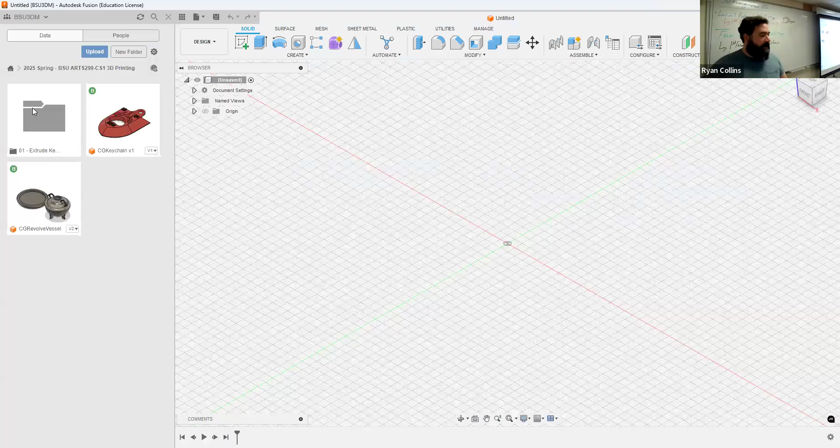First things first, I want to show people how to transfer files. If you started a project on your own file or your own team and need to transfer it in, unfortunately there's not a direct path to that. What you have to do is download the file from Fusion onto your computer, then re-upload it after you switch teams. So I'd open this up, open my little ducky puck. From here, I go to export, and it will automatically save it as a .f3d, a Fusion file.

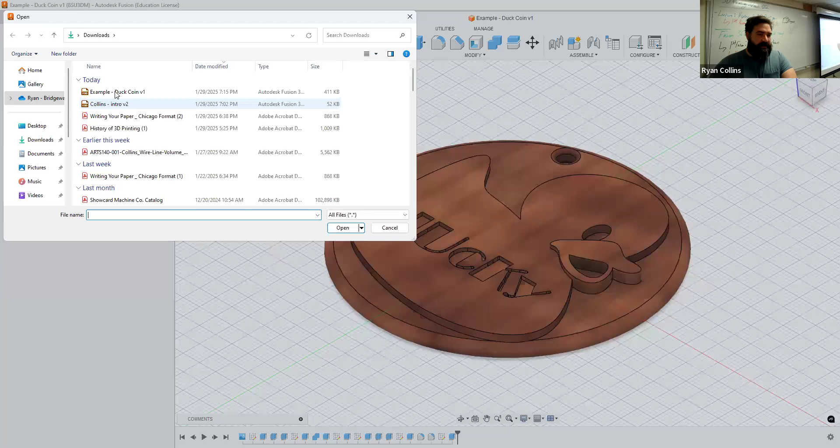Make sure you know where it's going on your computer. In this case, it's just going to downloads. Save, export—so you are actually exporting the file. If you just go to save, it's just saving the file as it normally would on the cloud storage online. From there, you go to upload, select your file, and that is my duck coin—open, upload. I'm not going to press upload because it'll overwrite things. But that's it, that's all you have to do. Unfortunately there's just not a direct one-to-one path.

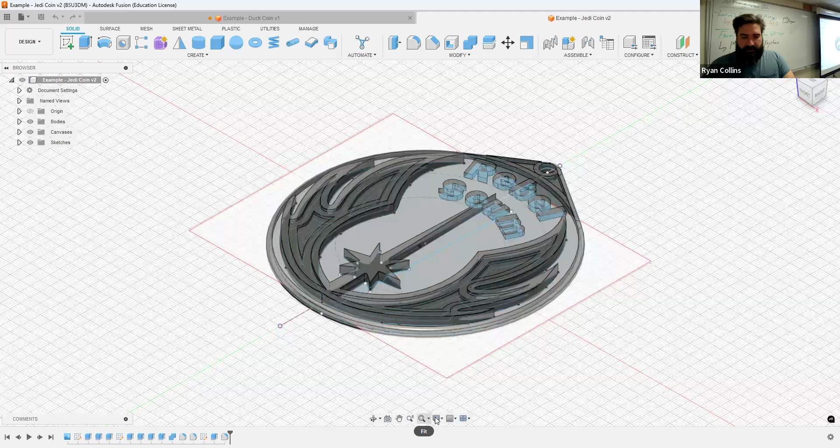All right, so I'm going to open up a couple of these just to show you some examples. Let me change the view settings because this gets a little confusing when it's hidden and such. There we go. And yep, that's current. Let me hide the canvas underneath, and hide the sketches. All right, there we go.

Just so you can see this more clearly, it automatically has an appearance—the default is like metal, supposed to be like steel. You can shift to auto color if you want. Hold shift and press N, shift-N, and it'll switch to an automatic randomly assigned color. It's a little easier to see what you're working on. That's all.

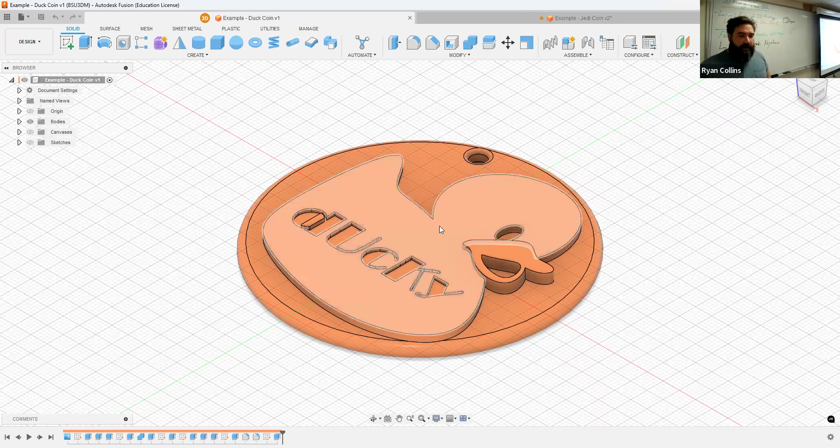All right, so this one we've got the little rebel symbol, rebel scum—why not, the little Jedi Order symbol. Great, you can turn this into a roundel, or an amorphous blob, doesn't matter. You could turn it into an adorable ducky, whatever you want to do. Main thing is we are making something where it's all one continuous piece that has layers extruded up. It can't just be one single thing, it needs to be a little more complex. But like you see here, tracing the duck, the bill, the eyes, and so on, you can extrude them to different levels and it will show up through them.

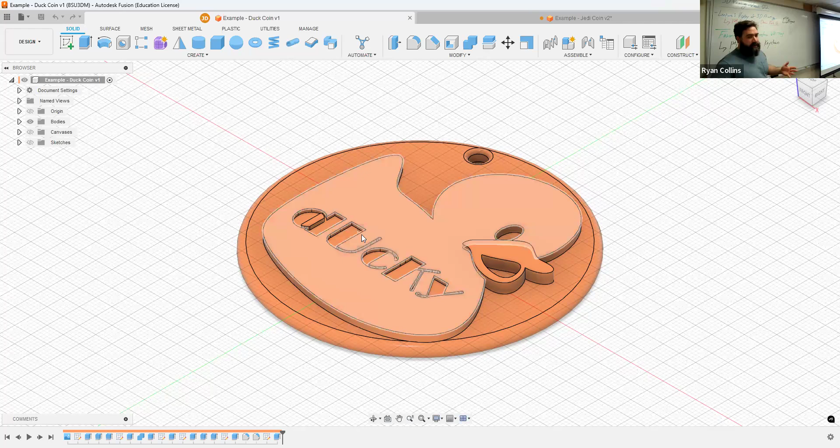Now, one quick word of warning about using text: if your piece is too small or the font is too small, it will not print, because the print head extruder only has so small a diameter. The extruder is 0.4 millimeters, so it's really teeny. But if your font ends up being 0.3 millimeters, it's just not going to print it—it won't just fail to come through, it will omit it entirely. We'll go through what happens and how to fix it. But ultimately, if we find ourselves in that position, either we scale up your object a little bit, or you go back and change the font, maybe make it boldface or something on your text. It's a very quick, easy fix.

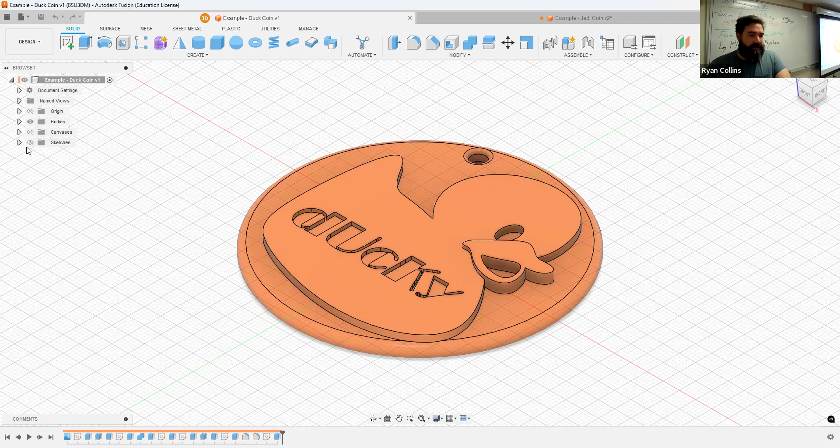All right, so just to go through some examples and show you how this works, first what I did is I imported an image of an adorable ducky. Find a picture, go to insert, or the default symbol, canvas. Bring that in, insert from your computer, find a picture, drop it in. And I'm just going to get out of this real quick. Let's see here, I don't remember what all I have here.

Let's say stock photo there. What you'll then have to do—I'm just going to hide this current canvas, the duck—is pick a plane. This is the standard thing for working with any sketch. You have to pick a plane, a virtual work environment. We talked a little about this last class, but these colored lines refer to different virtual directions, and they are subjective, meaning it's not always this way—it's just reference to how you're looking at the virtual plane.

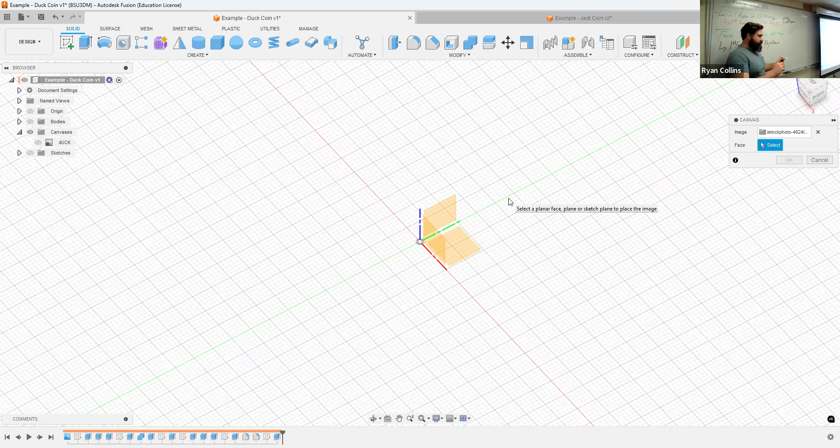So the red is your X axis, left and right, side to side. Y, green, is front and back, toward and away.

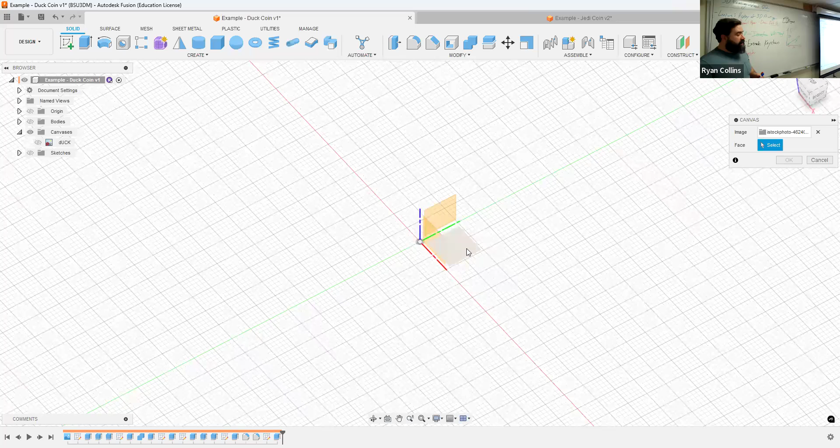Z axis, blue, up and down. So when I say I'm going to pick the XY axis, it's the one in between.

Ran out of colors. And I dropped my cap.

XY axis is like you're working on a tabletop, looking straight down. If it's, say, like the XZ axis, it's straight up in front of you, like you're working on a wall or a... I forgot the word for it. Easel. There we go.

Trying to find where I dropped my cap.

So in this case, I'm going to build on the XY axis. It's the easiest, like you're looking straight down from the top. There you go. Select. You have a bunch of modifiers here you can play with, like the different size, opacity, so like how dense the image is, how see-through it is.

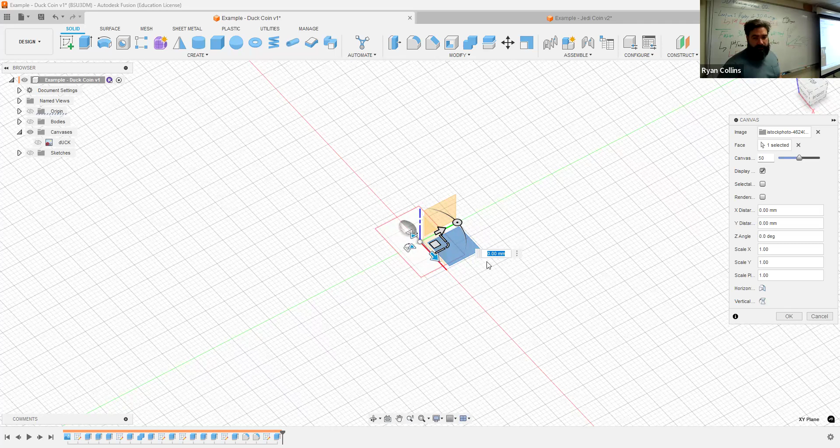But honestly, you can also just leave it as is. Don't worry about sizing it up. You can do that by hand later, mainly because sizing it is a scale, meaning it's relative. 0 to 1, meaning like if I want it half as big, 0.5, something between, or we can do it numerically, but you can see scale factors times 2, times 3, anything in between. You get the idea. But I'm going to leave it just as it was at 1.

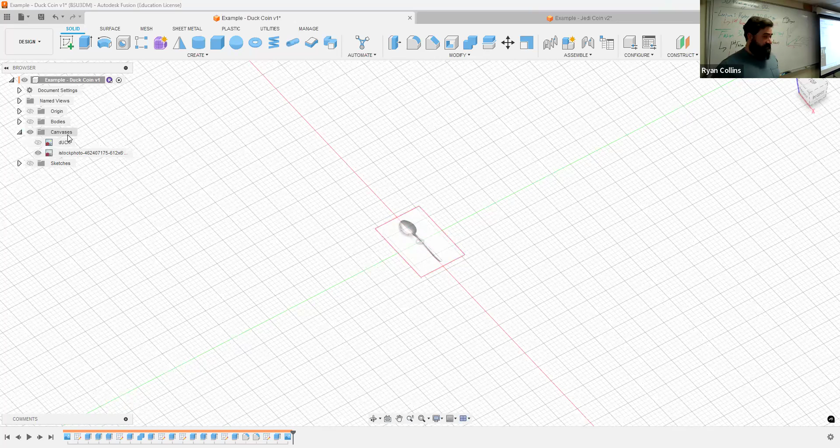Hit OK. Reason for that is I want to do something else called calibrate. I want it to be a specific size, not just relative size. To do that, I mouse over the image file, and if it's not showing, use the drop down, which now will have canvases there. Right click where it says the actual image. Go to not edit canvas, but calibrate.

What this will let me do, and I'm just going to snap to the top view, I'm allowed to pick 2 points. So in this case, it's a spoon. At the top and the bottom. It'll show you the actual distance between there. 14 millimeters. That's not that big. That's like yay big. Millimeters, not centimeters, millimeters.

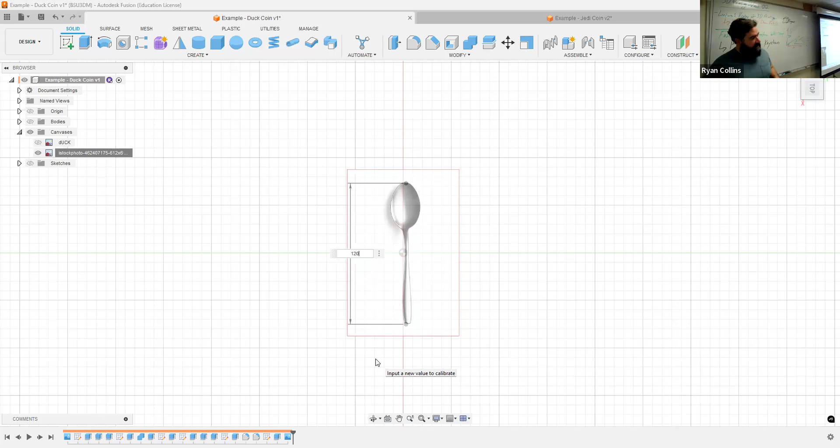Obviously, I want a slightly bigger spoon. Let's make it roughly, that's about 6 inches, 120 millimeters. No, not 120. It's more like 200. There we go. So let's say 120 millimeters. If you need, we have rulers over there that have both imperial and metric scale on there. Makes it a lot easier.

But, oh my God, that's gigantic. We resize. Press F6. It'll resize the thing. Where is it? Fit or resize. There you go. So that just shows you now I actually know exactly how big I'm working. So like when I said it needs to be no more than about 200 millimeters, now we're at the size we need to work.

But instead of making a spoon, I want to make a ducky. There we go. So you've calibrated the thing. You can always make changes to it later as you need. Cool. From there, you create the image. Let me cycle back on my time slider, and we'll walk through it.

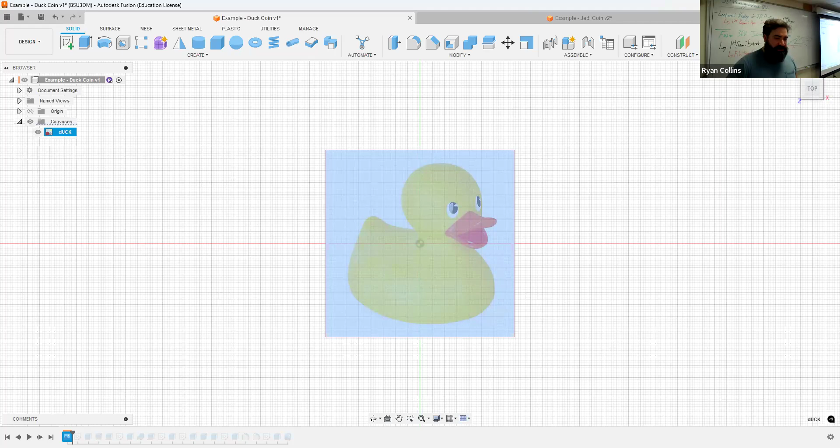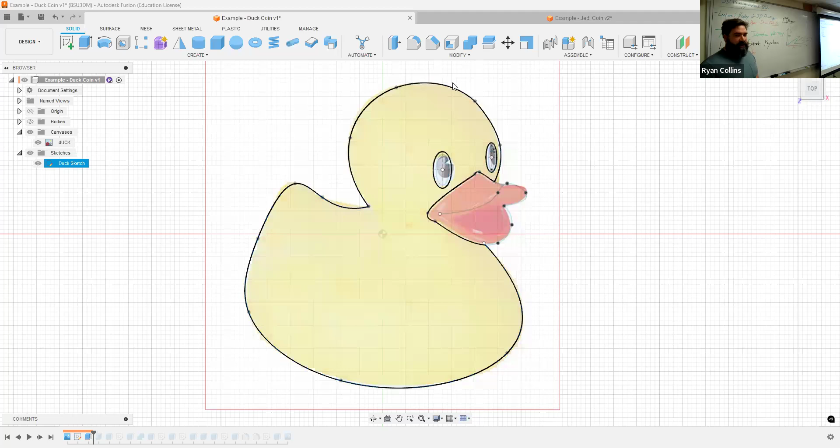I made the image, create a sketch. We're going to draw a sketch. We'll make an outline. I'll show you how to do some of this stuff. Now, the only reason you would make multiple sketches is if you want to isolate things. You cannot start a sketch, draw part of it, like the bottom, and then start another sketch and draw the head. That will not work. It all has to be the same closed sketch. I'll talk to you about what I mean in a moment.

From there, we're going to use that sketch and extrude stuff. Meaning, in this case, extruded the bill. Problem is I started hiding stuff when I was doing this. Making the eyeball, extruding, make the body, stuff like this. The body, these are all hidden for whatever reason.

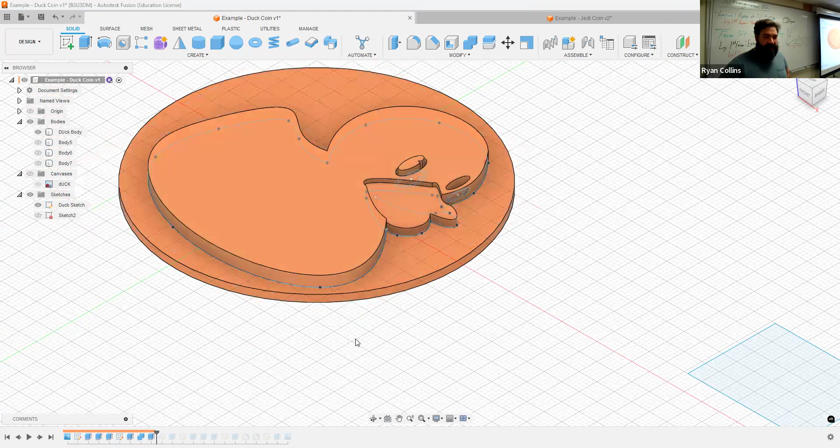These can be different heights, so it will translate because we're not using different colors of the filament. Yes, there are ways to change filament colors, but we'll get into how to do that later. It's not through this. It's through heights and layers. But you can make a bunch of different changes. In this case, I'm just going to hide the canvas so it's a little bit easier to see. You can make different elevations, changing stuff up, making more outlines.

Because in the history slider, I had the objects hidden and such. Make a bunch of changes. You end up with, oh, good Lord, it keeps hiding everything. And now it's hiding different versions.

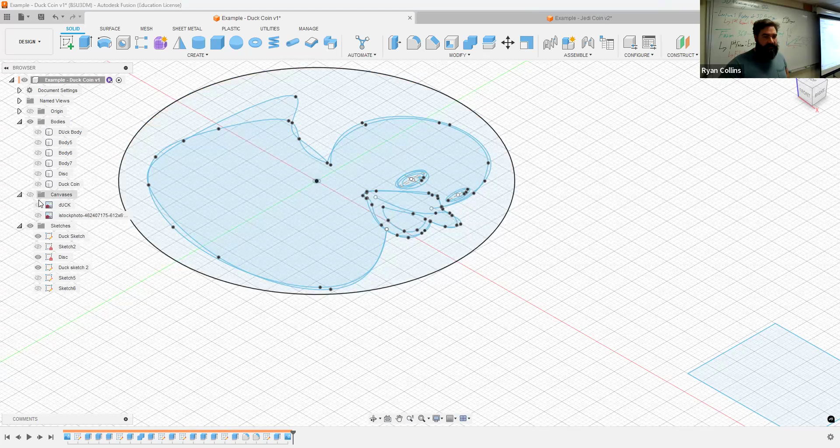There we go. So I added text, stuff like that, and then I just use the extrude tool to go back into it and use it to cut things away. I'll show you what I mean in a minute. But basically, that's kind of what we're going for. If you want to make something more involved, we make something more involved. That's pretty much it. So let's start a new project, bring something in here.

And first things first, what do you do first? Save it. Save your project. Control S, Command S, whatever. Collins in class, or see if I can spell. We'll go ahead and make a tick reference anyway. Spoon. All right.

If I want to start this from an image, obviously, find the image, whatever you want to use online. Take your own pictures, doesn't matter. Take your own drawings. I'm going to insert a canvas image. Start with that symbol. Insert from computer. Find the image. Select my profile or my plane. In this case, the XY plane.

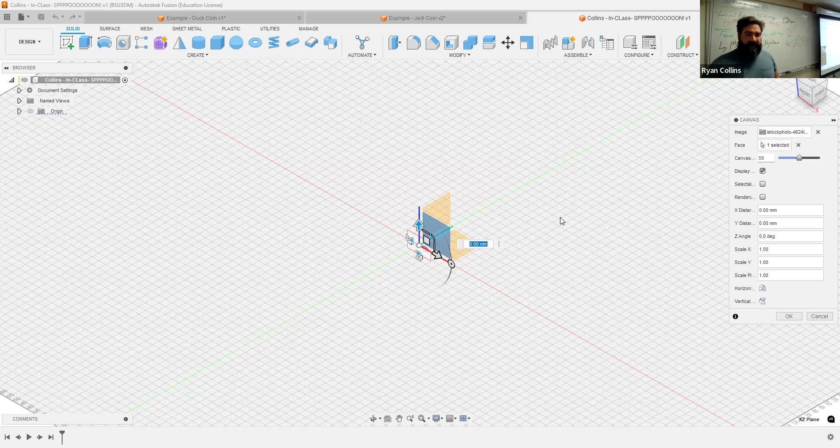Oops, I accidentally selected the wrong one. That's okay. On this toolbox here, because in Fusion everything is with pop-up toolboxes. I accidentally selected the wrong face. That's okay. Just hit the X, select the face you meant to. There you go. I'm not going to change the size right now. I'm going to leave it as is. Hit OK.

All right. Open the drop down. Right click on the file name. Go to Calibrate. I need the top view so I can actually see what I'm doing. Select one, select the other. Let's make it bigger. Make 120. There we go. F6 resizes.

Now, if you're trying to make something that is symmetrical, I do definitely recommend trying to orient that. And to do that, you can either just move the canvas, which if you select that, you can go up here to the top, go to move copy, or press M, like Montana, on your keyboard. That brings up the toolbox. I want to move sketch object. Actually, let's see, will it let me do any of that? Well, you jerk, you're not letting me do any of it.

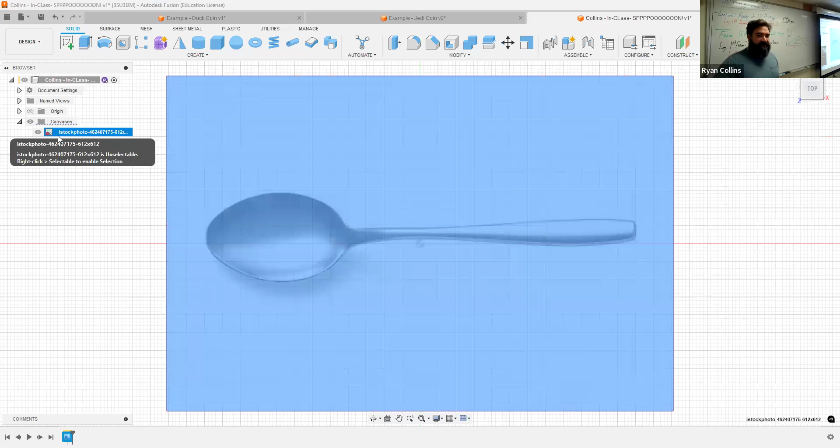All right, fine. So if it's not letting you, you do have to right click and go to edit canvas. Sorry. But all you gotta do is just use one of these arrow keys, click and drag, bring it down. If you need to rotate it, that's what the circle thing is. Now, there are locked increments, so it's going by 5 degrees. That's a lot. So you might need to try it numerically. So I don't know, -2.5, closer, -2, -1. Yeah, that's close enough. All right, there we go.

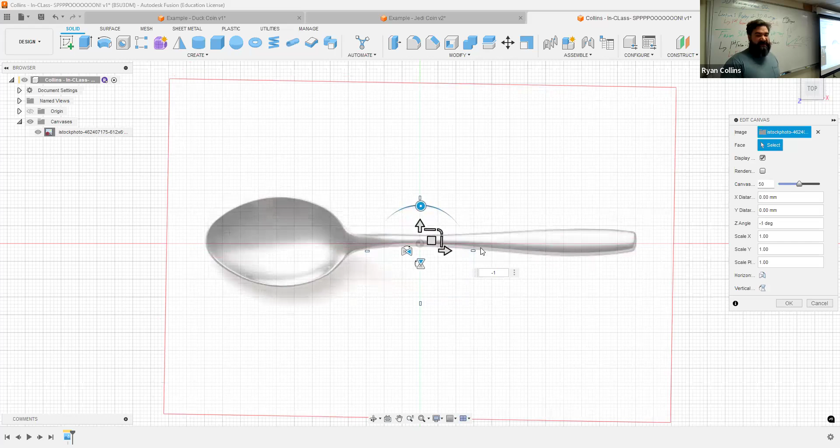So we're just going to ignore the outline. I just need the spoon there. Cool, there we go. All right, so from there, doesn't hurt to save. You don't have to save, but I'm just going to. Canvas. Oh, also I had caps lock on. First thing is create sketch. Select there. We're going to select the same face we're working on. There we go. Now we're just going to do our best to trace.

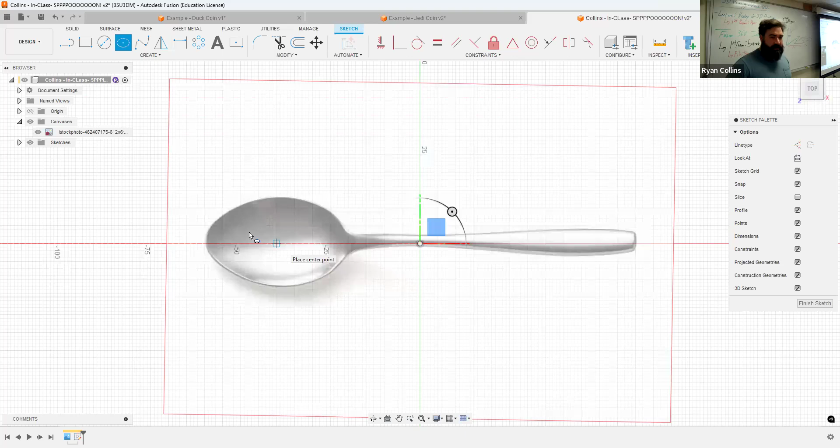Now, obviously, if you have a symmetrical thing, you could start with something like a circle, or in this case, an ellipse. An ellipse starts with a center point. Since I tried to get this all right on the x-axis, that red line, I'm going to pick somewhere right in the middle. First, you select one direction, then you select the next, and you can see how it makes an ellipse. It does not have to exactly match your canvas. I don't care. Like I said, the canvas can just be a reference. You're trying to get it close enough. There you go. Cool. But if you're making this by hand, you can use lines. You can use whatever you like.

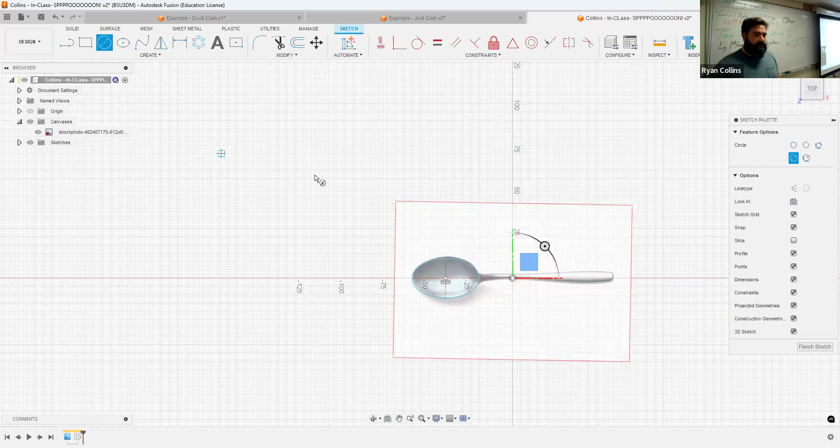Remember, you have circles. Let me zoom out a little bit just so we can play around with this a little bit. You have center point circles, which is the default circle. Starts at the center, and you either draw it out, move your mouse out, set it there, or if you wanted to, you could put in a numeric value. So actually, I wanted that to be, I don't know, 45 millimeters. There you go. If you need to change that, mouse over the dimension, double click, and it'll let you adjust that to say, maybe it needed to be 55.

There you go. If you never had a dimension on there to begin with, there's the dimension tool. Or you can just press D, December, on your keyboard, mouse over, and you can see now it has a dimension, and now I can change that to say, oh, it's like 109 millimeters. Let's make it 110. And it just resizes. That's it.

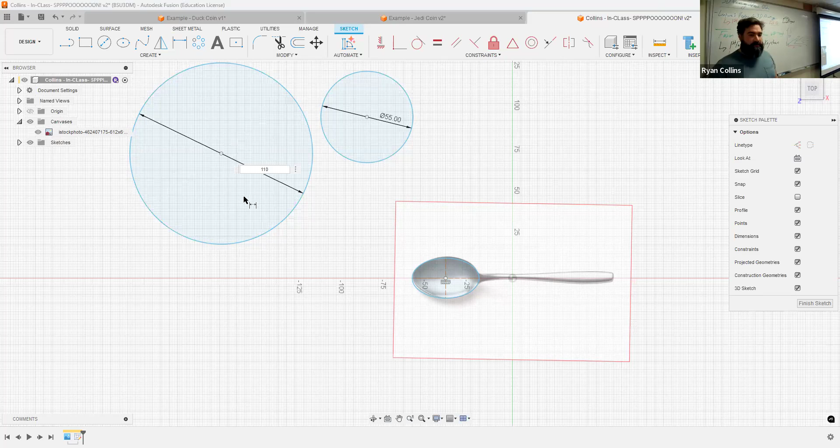You have your basic straight lines, which is the line tool. Press L. You can just go around, blah, blah, blah. Eventually, you will need to make what's called a closed image. So you see how these two circles are highlighted blue, but the little weird line drawing is not? That's because it's not enclosed. It doesn't complete the line. If I leave it there and press enter, it's left open.

But I can click and drag that point, make them overlap. Now that thing turned blue. Now it's an enclosed sketch. That's something I can extrude. If it's not enclosed, it cannot be extruded.

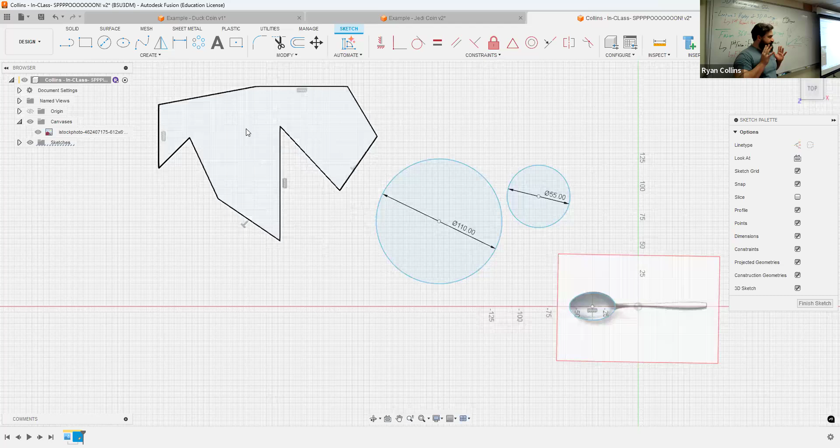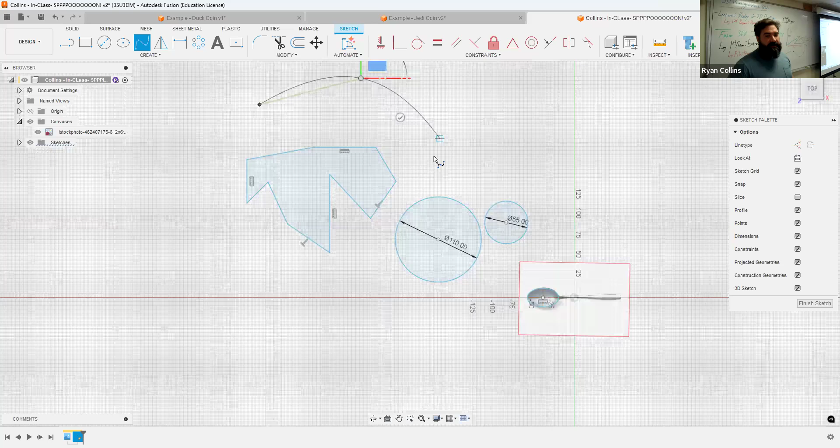The way to make curves, if you're just making general curves, is what's called a fit point spline. Basically, you are defining points, and the computer is trying to draw a curved line based on those points. So using the fit point spline tool, the first 2 points is a straight line because the distance between 2 points is a straight line. Once you start a third, now you can see the curve. It's not an exact curve. It's based on mathematics.

To finish, press enter, and you're left with, at every point, these green lines coming off. These are your handlebars. You can grab one of these, the points on the other side, you can turn it, and it'll turn your line. But see how everything turns with that. If you shrink those handlebars, the curve gets tighter. If you stretch them out, the curve gets wider.

You can drag these points around. You can add points to make a sharper point. If you're trying to make a curve, say like with making the duck head, more points makes a tighter curve, fewer points makes a larger, smoother curve.

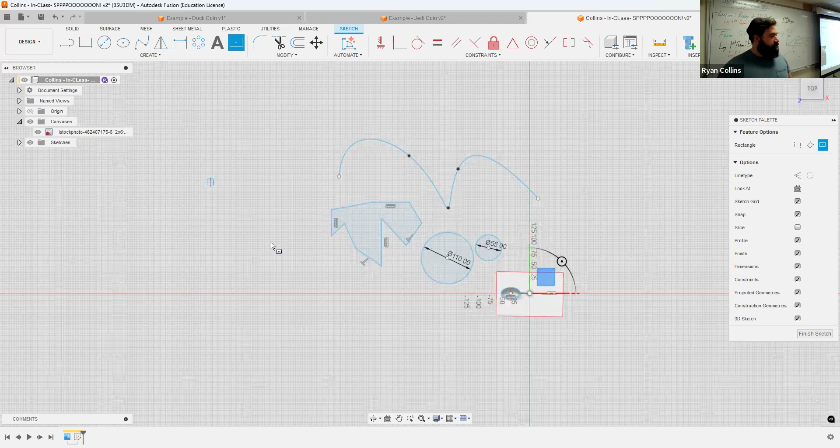You have rectangles. Your standard is a center point rectangle, meaning you pick something in the middle, you drag the mouse left and right, up and down to make it wider, more narrow, taller, or not. Use tab to toggle between the 2 different dimensions. So like, all right, that one's 220, and the other one I haven't decided. So make it about that big.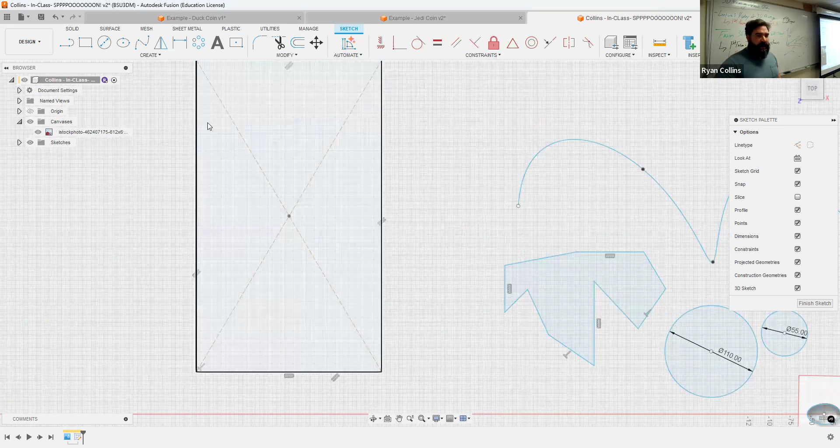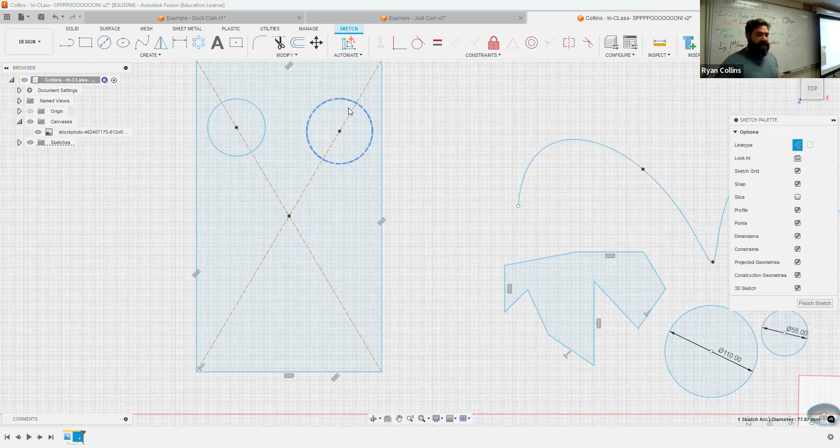Cool. These orange dotted lines are called construction lines. These are handy for making partial lines or reference lines. So say I wanted to line some stuff out on this, I could make like a circle against these lines. There we go. What if I want to use those circles as references? Select the circle, press X or use the toolbox. It creates a construction line. Now it's something that is just a reference line. Oops, that's a mirror tool. The rest of the stuff is pretty self-explanatory.

Polygon makes multiple-sided stuff. If you select the polygon tool, you have circumscribed or inscribed polygon. That just means it's based off of a circle, and you want the polygon on the outside or inside of the circle. I think this was circumscribed. Drag outward, but if you want to change the number of sides, do not press anything yet. Press tab on your keyboard, and it toggles over to the number of sides. I want that to be 12-sided. There you go. Now I can drag it in and out and change that.

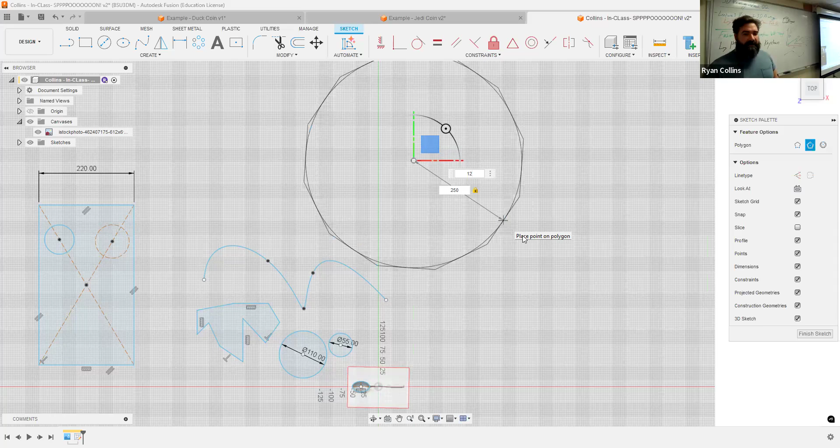Or if I want it to be a specific size, 250. Now I hit enter and it changes it. If you wanted this to be straight up and down, we can use what are called constraints. These allow you to put actual dimensions and restrictions on freehand drawings. So this polygon is this way, but I need it to be flat on the top and bottom and up and down on the sides. What you can do is select horizontal/vertical, and select the top one. It snaps it horizontal. That's all.

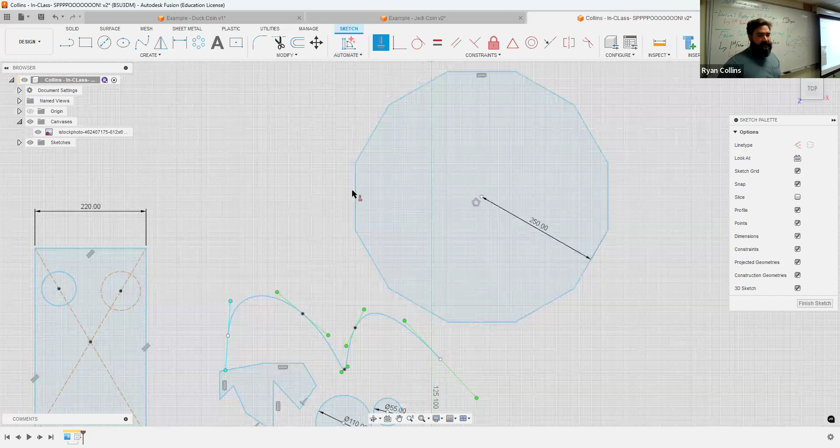Or you could have done the same thing over here. It's going to give me an error because it's saying it's over constrained. You don't need that many constraints on it. You can make a lot of moves, or say on this circle, I wanted to draw a line from somewhere so it snaps there, okay? But what if I wanted that line to actually be a tangent, which means it's directly coming off of that circle? I use the tangent constraint.

Most of the tools in Fusion work by having 2 selections. You select one object and the reference. Usually the first thing you select is what will move. The second thing you select is what it's related to, what it'll move to. So when I select the tangent constraint, I select that first line because I want it to be a tangent to the circle. That first one will move.

Now I select the circle. It's going to move in relation to the circle. Now that line is tangent to the circle. If I had selected the other way around, the circle would move to where it's a tangent to that line. Play with the other ones. Equal means that they're going to be equal sides. Coincident just means they're going to snap together.

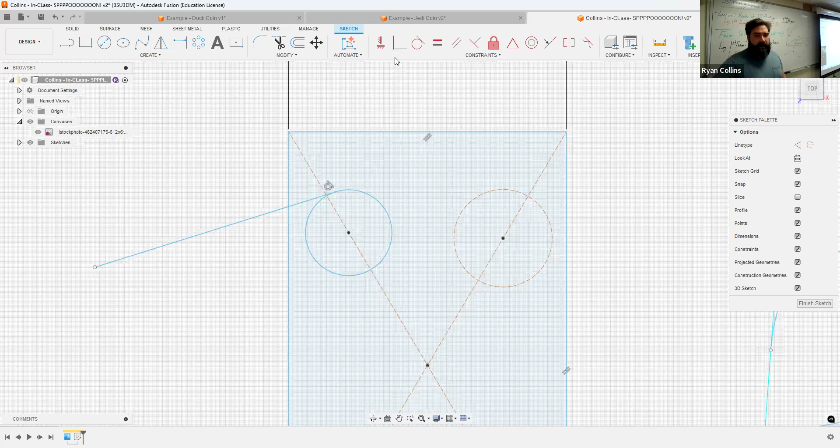Parallel obviously means things are going to be parallel to one another. Perpendicular, you get the idea. We'll play with those more later, but the main thing is you're going to be making stuff a combination of those. Now, if you have to make multiples of the exact same thing, don't do it freehand. Be lazy, let the program do it for you.

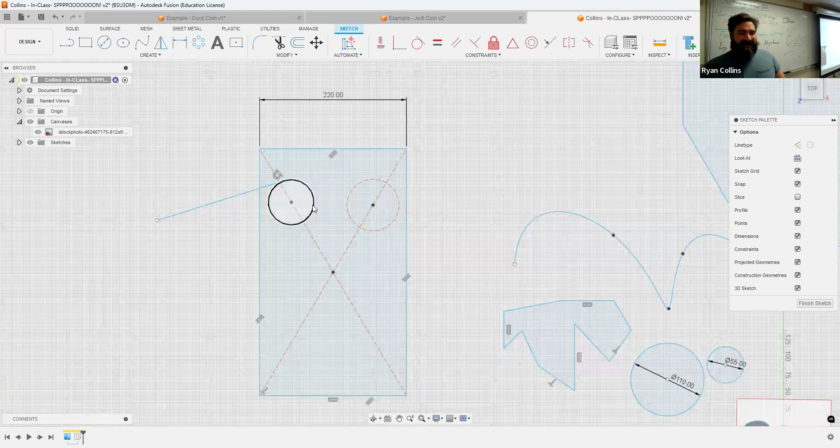So, let's say I wanted to make a whole bunch of these circles right here. I can use the circular pattern tool. Select that circle. First one in the toolbox, it says select your object. What is your center point? What is it making multiples around? I'm going to select that center point there. Now it's going to make multiples referencing that first object.

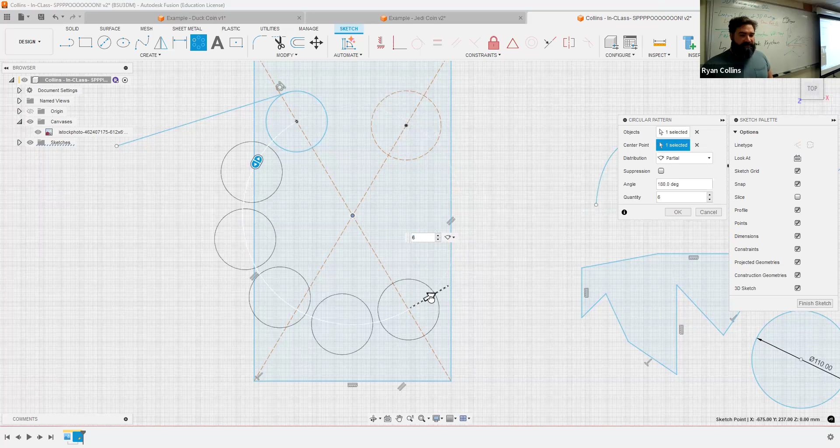The default is 3. I can use the slider to add a lot more or fewer. And you have options to make it all of them, or you can only make it partial. I made a bubbly smiley face. I can shrink them to make them overlap, that sort of stuff. So basically, a lot of this stuff is going to be lazy, let the program do the work for you. I am all about letting it do my work for me.

So there you go. We made a whole bunch of stuff. We made some weird stuff. Let's go back to making the spoon here that I was trying to make. I'm going to do my best to build this out. Maybe I'll use a center point rectangle to make the spoon handle. Cool, I'll make them overlap. Now, center point rectangle might not have been the best option because I didn't really know where the center was. So instead, let me delete all of that.

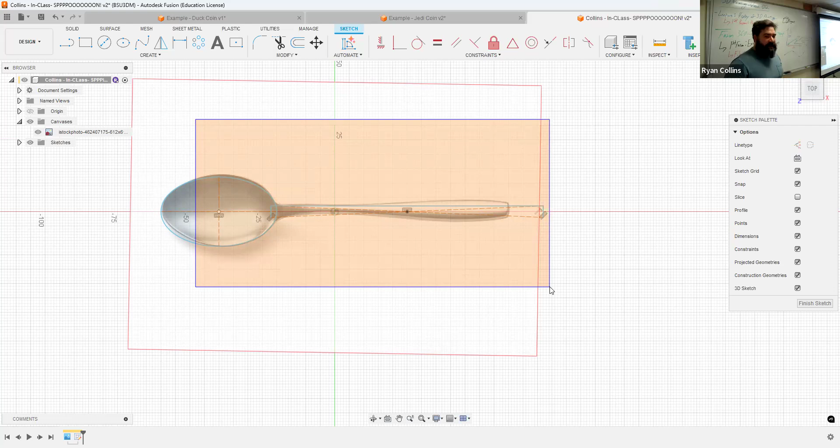By a selection box. You have 2 different major selection boxes. Obviously, you can select things individually. If you click and drag from the left and drag right, you see how it's a box with a solid blue line? It will select only things that are completely inside of that box. So it did not select the oval. If you select from the right and move left, the yellow box with the dotted blue line, it will select everything that it touches. That's the difference.

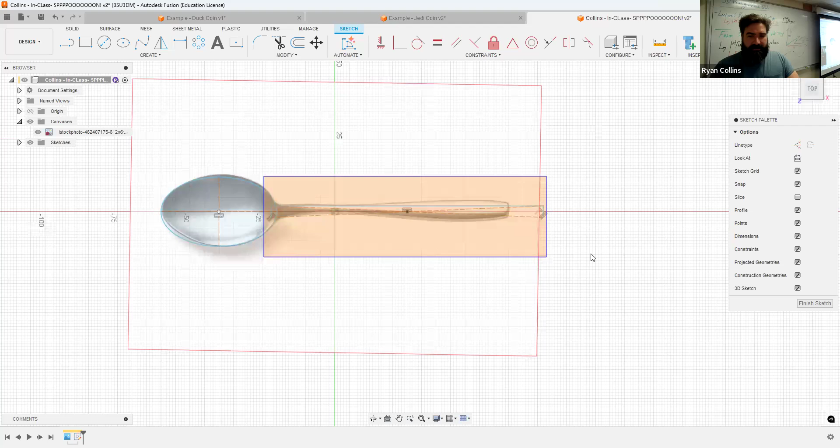So I'm going to get rid of that little rectangle I started drawing, and I'd rather do this by hand with a line. But like I said, I'm going to be lazy about it. So I'm going to draw a line right in the center, all the way to the back, straight on. If I'm having trouble making it flat, use Tab, go over to degrees, and press 0. There we go. Now when I drag it back and forth, it's going to stay there. The reason I'm drawing a straight line is I can use one of the other tools, the Offset tool.

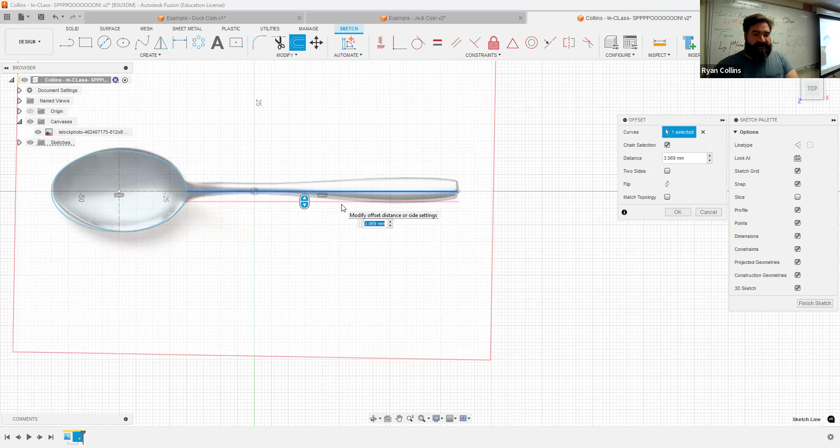This makes a copy of one line exactly the same as it moves outward. In a straight line, it makes plenty of sense. But if I use that tool on, say, a zigzag thing, offset is trying to match that in single directions. What I mean by that is you use offset on this one and drag it outward. See how it distorts. Just be aware of that.

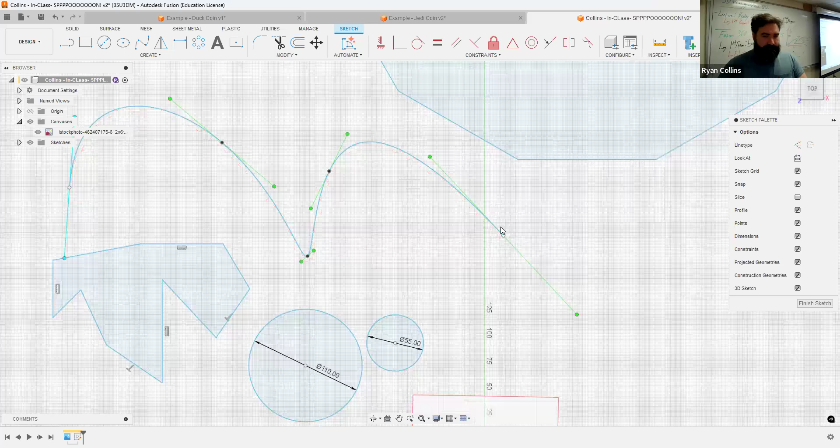So the spoon, sure, whatever. If I wanted to, I could have also tried to make this a fit point spline. Let's start somewhere like there. Yada, yada, yada. Close enough. Zoom in. Let's drag these points around, try to get it close enough. Again, remember, close enough is close enough. I want to not have to draw 2 of those.

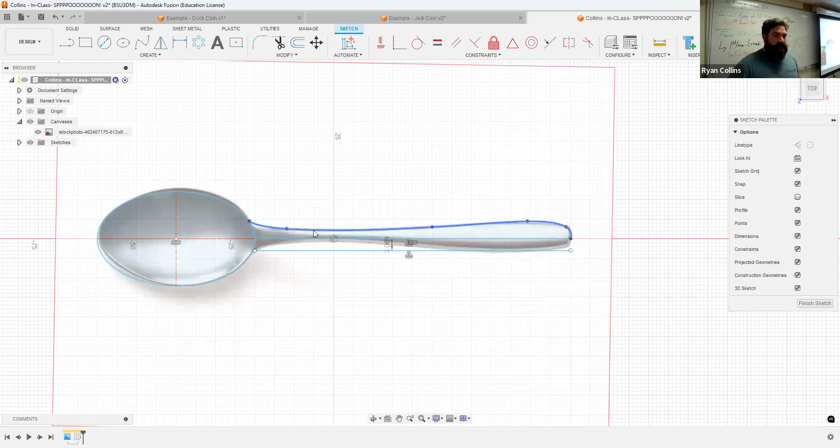So let's use the mirror tool. Select that one. Mirror tool, these 2 triangles. You'll have to select your object and the mirror line. It has to have something to mirror against, what it's relative to. That's also why I drew that center line. Makes a copy, hit OK.

Now it's going to have these constraints show up. All these little lines, all these little symbols, that's the symmetry tool. So if I make a change to my original, it's going to make a change to both of them. Like I said, be lazy, let the computer do the work for you.

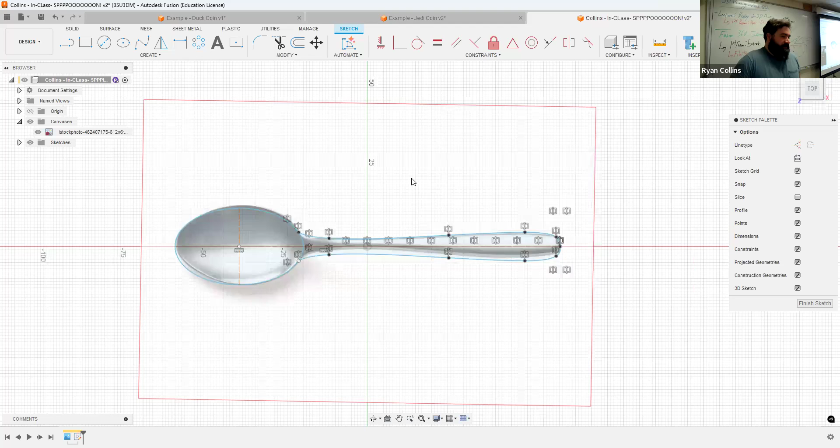I'm going to delete that offset line I made before. Because I don't want this line to interfere with things, I'll change it to a construction line. Press X, dotted blue line, cool. That could be a spoon, or I can add stuff to it later. Anyway, get the idea - finish sketch.

Now, because of the way I'm going to work here, I'm going to make a second sketch. This first one I'm going to label - just slow click. Spoon, there we go. Remember how to spell, cool.

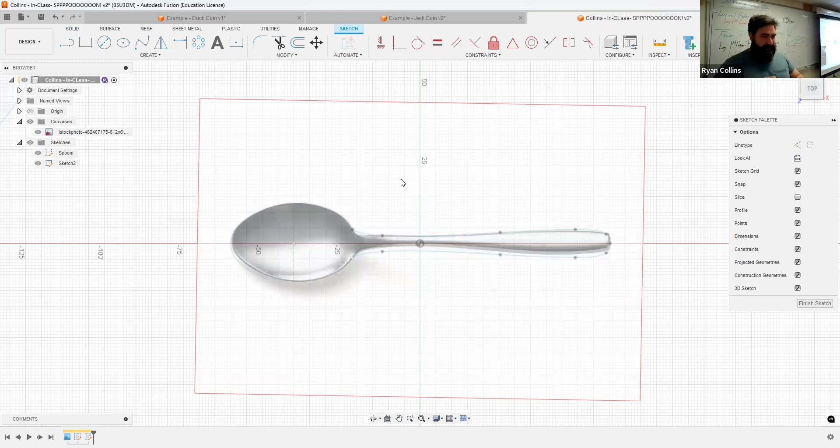From there I'm going to start another sketch, same place, but this I'll make like the outline, the outer section, so it's not just a floating spoon. In this case, sure, I keep saying amorphous blob - let's make it an amorphous blob. I'm just making something that surrounds this. Cool. Actually that kind of looks more like a fried egg. Not bad, works for me.

All right, hit OK. Now before I hit OK, oops - what if I want to make a change? Oh no, I actually meant to make a change to this. I wanted to make a double line there because I want to reference something later.

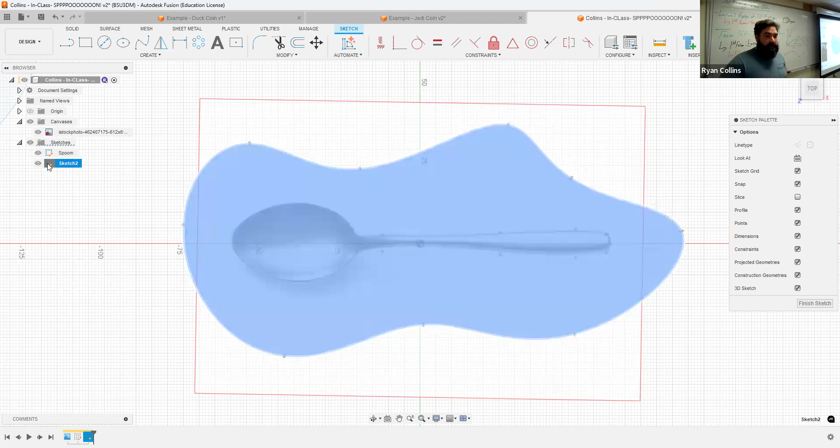You can either right click where it says that sketch, go to - where is it? Oh, it's not showing up there. Used to, weird. All right, so if you double click on it, it will bring it back up into the sketch environment. Or if you find it on the time slider at the bottom, right click on the symbol and you can go to edit sketch. I don't know why it's not showing up there. Brings you back into the sketch environment.

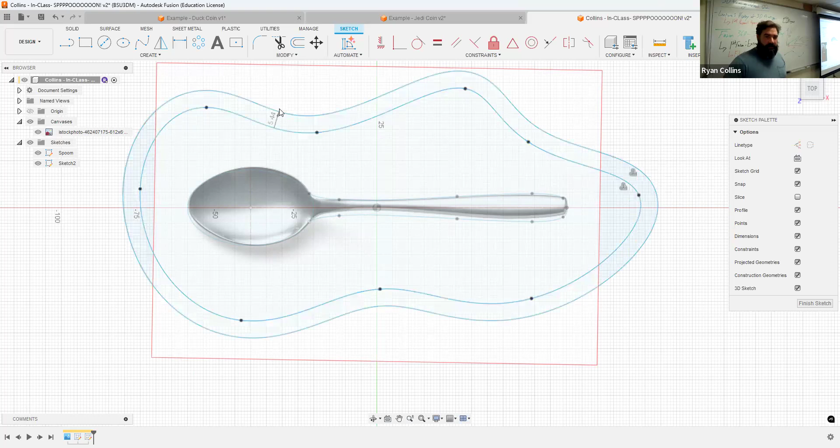All I wanted to do is use the offset tool and make an outer line there. I'll show you why in a minute. Hit OK, finish sketch, cool.

All right, so now I have - and I'll hide the canvas just so I can see what I'm doing. Whoa, I forgot, I probably should have deleted all of that mess. That's what happens when you make a bunch of silly doodles. All right, now I have my spoon shape, my outline, and this amorphous fried egg blob.

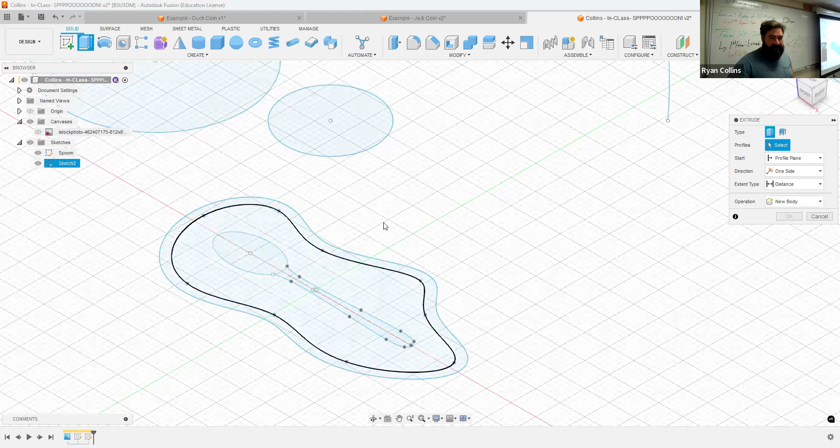Cool, now we're going to use the extrude tool. I'm going to select the sketches for my spoon. I accidentally selected everything, I don't want that - on the toolbox press X, get rid of that. I wanted just that, just that. If you're having trouble selecting those, simply hide one of them to isolate what you're doing.

There you go. Now I can drag this upward, or you can do it numerically. So like I wanted it to only be 5 millimeters - it was already 5.

You can also - whoops, there we go - you can also rotate this. I'm not actually rotating it, I'm actually adding a taper to it. So you can do this numerically here. So if instead of just going straight up and down, I make it angled.

Let's say -5, shrinks down a little bit. Let's say -20. See how it's angling upward? That's something you could do - you don't have to, it's just something you can play with. In this case I'm going to put it at 0 because I don't want to mess with it right now.

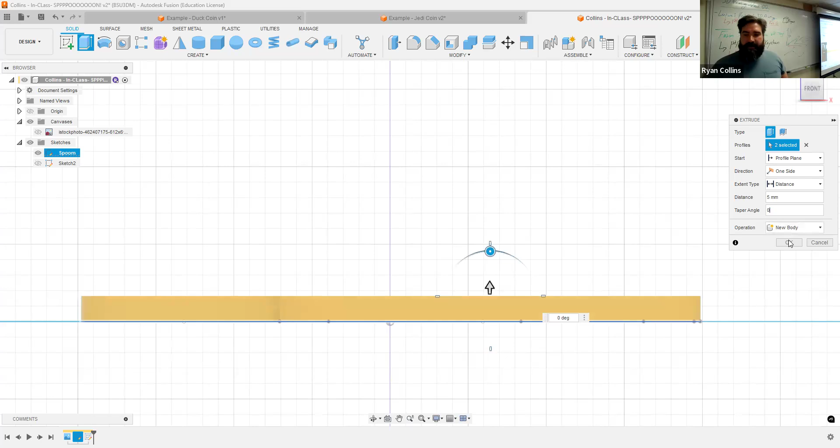Hit OK - oh my god, all my sketches went away. Don't worry, that's the default thing with Fusion. It assumes, oh you've already made one alteration to your sketch, you don't need to see that ever again. I was still working with that, so it just automatically hides it. Unhide it with the little eyeball symbol. There you go. I want to unhide the other one too because I want to make an outline and such.

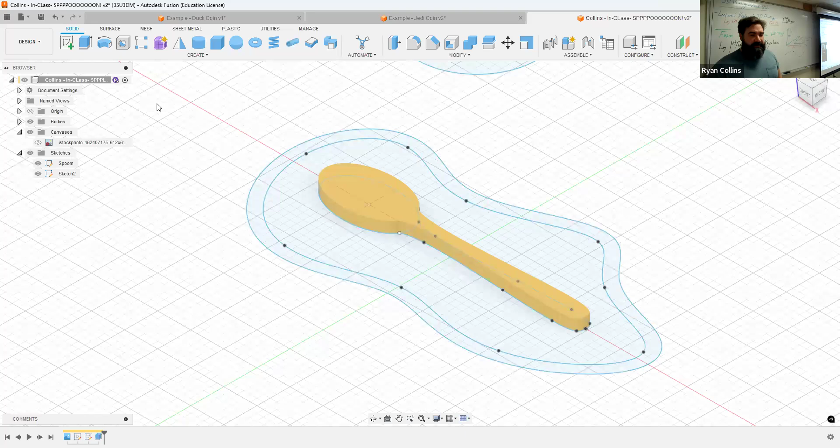So in this case I'm going to use Extrude again, and I'm going to select both the inner and outer line there. And I don't know, let's go 2. Or you can go negative, so you can go downward - so -2. So you can see it stretch downward.

Now we're going to play with some of this other stuff later, but one of the main things is at the bottom of the toolbox before you hit OK, there's operation. Join will automatically link them into one body. Cut is a way where you can actually use an extrude - I'll show this in a bit - where you extrude into a body and use that to cut away from an existing body. Intersect is if they have an overlap and you only want the overlap. New body is a new body, and I'll leave it at that - new component is something for later. New body, there you go.

Now when I expand the body's drop down, you can see I've got to hide all that stuff. I've got my spoon.

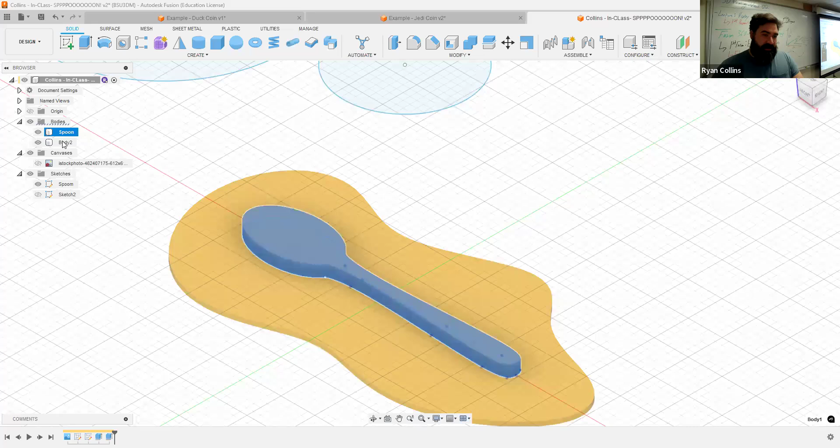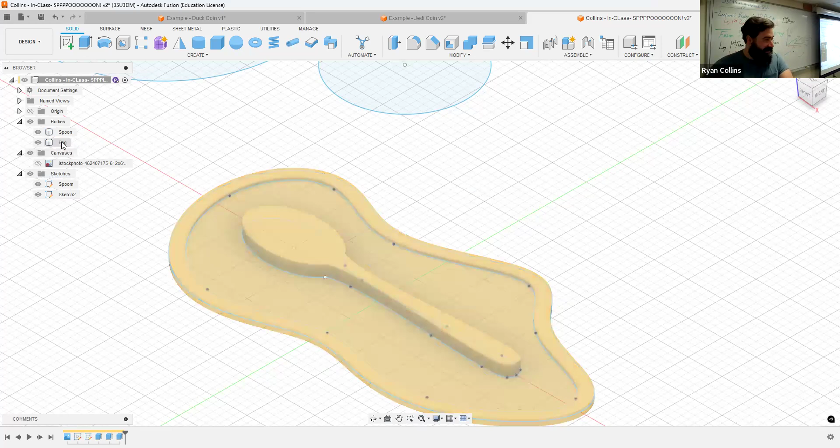At this point, I'm just leaning into the egg. The reason I made that offset is now I want to extrude just that line. I'm going to go back to extrude, or you can just press E for extrude. Now I just want that line there, so I'll put 1 millimeter, going upward, and leave it at join so it automatically links. It did not create a new body, that's just a way for me to create this outline. Different ways to add a little bit of stuff, that's it.

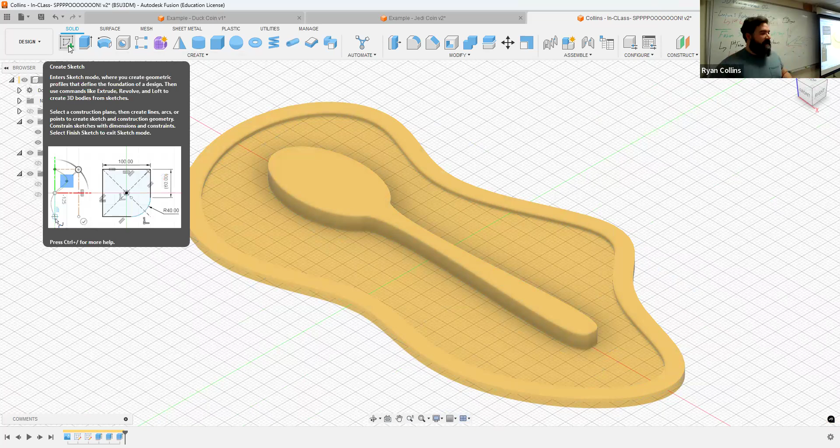Let's hide those two sketches. At this point, this is where you could do stuff like maybe make some text. You'll have to make a new sketch, finish sketch, new sketch, finish sketch, you get the idea. But the other thing is, I can add sketches onto surfaces, it doesn't just have to be the original lines. I can select the origin plane, or I can actually select the top surface of an object, like the spoon or the egg shape, whatever.

Let's select there, I'm just going to lean into this at this point. In the sketch toolbox you have two options: there's a basic one, and then sketch on a path. I'll show you the difference.

Basic sketch, you have to click and drag and draw a rectangle. Basically you're just creating a toolbox or text box, just like a lot of other programs. We'll go with eggs.

Obviously a little bit too big, so let's change the font height. Let's say that should be 8 - oh god, not 87, just 8. There we go. You can play with the different stuff, play with the different fonts. Very fancy eggs.

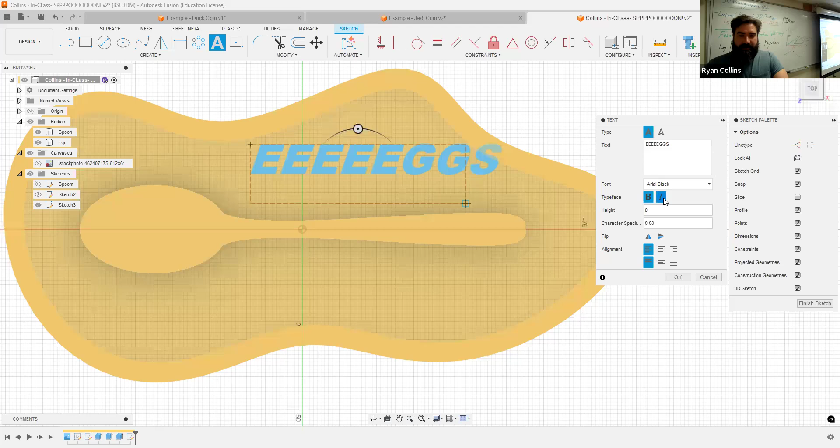Very fancy there, we can go with bold, italics, whatever you feel like. If you were making this a stamp, you could flip it horizontal so it's in reverse. Stuff like that, you can use your standard alignment stuffs, all that kind of fun.

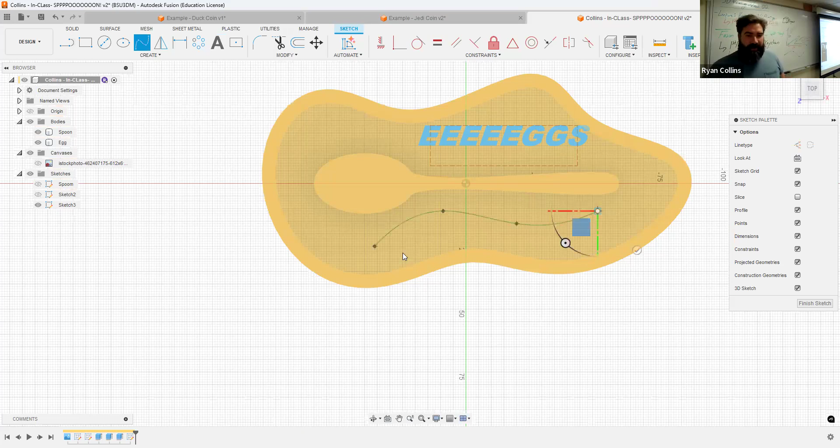But what if I wanted to make it wobbly wobbly? Make a spline, you have to have a path for it to follow. Just draw that line. If you don't want it to interfere with anything, select it, press X, it turns into a construction line.

From there, select the text box again. I'm going to select the other option, text on a path. Select the path, it's that line. Now there will be flips and such. You only have so much control over this. I don't know why it is upside down - I will admit it does some weird stuff how it calculates orientation. I think it's just because it's below, or on the other side of the x-axis.

And we'll go with spoon. You want to make that boldface, italic, or not any of them? Let's see here, what all kind of silliness do we have - curls, some weird fonts. Very fancy, anyway you get the idea.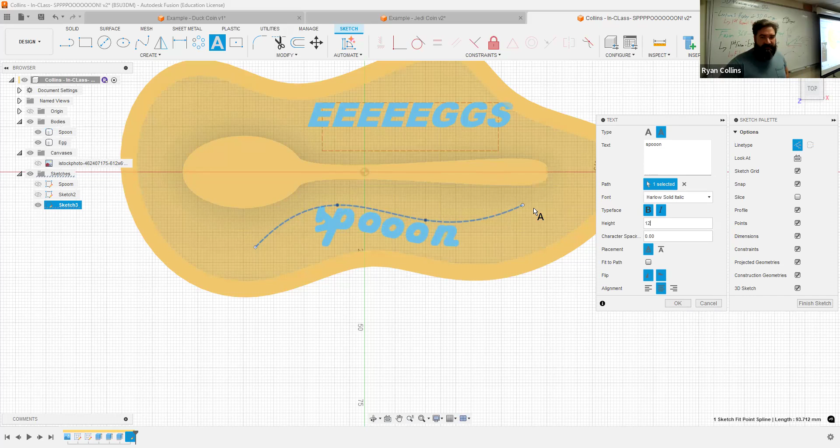We play with some different fonts, whatever. Sometimes you might run into an issue - ooh, extra fancy, need to make that bigger. Sometimes your fonts might interfere with it becoming a sketch because that's how this works, it defaults into being a sketch. Hit OK, let's hit OK.

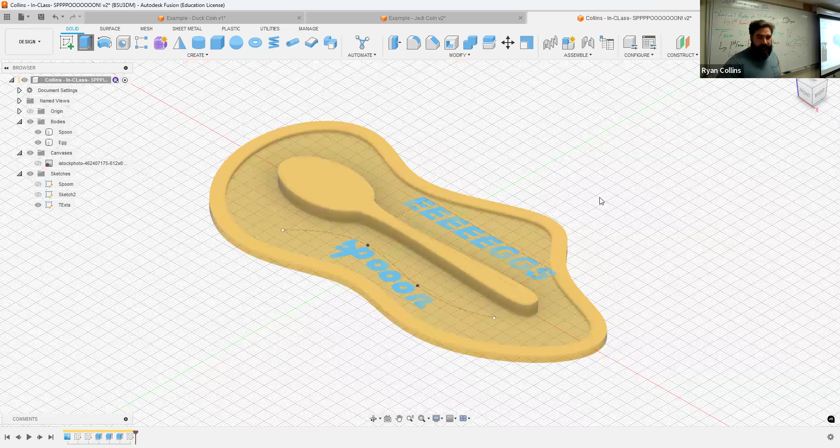So that sketch is now the font, or let's say text, because that's actually what it is. I'm just going to switch and hit the home button so you can see a little more clearly what I'm doing here. Use the extrude tool, I'm going to select one of the sketch parts.

Drag it upward - oh, I selected very much the wrong thing. Again, if you're having trouble selecting stuff, you can isolate, you can hide stuff, zoom in sometimes. There we go, that's what I wanted. Zoom out. Let's only make it 2 millimeters. There we go, it's on automatically join. Cool, join, there we go.

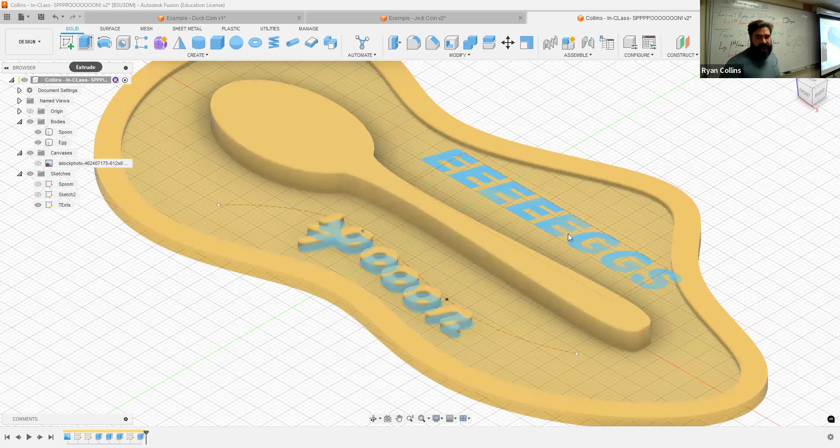Unhide the text thing so I can grab the other one. Hit extrude again, if I can just grab only that - well, see it keeps... there we go. What if I pull downward? If I go downward, you see it automatically switches to cut. If I hit that...

And it calculates, let me hide the sketches so you can see the difference. One is it's gone downward, the other one it's gone upward. That's it, so you can play around with this stuff.

The one other thing, like I said, it does need some kind of a hole. Often enough you can use the hole tool, but I find it a lot more effective and easier to work with if you simply alter the original sketch, if you add it into the original sketch. So in this case, let me relabel that. Make sketch.

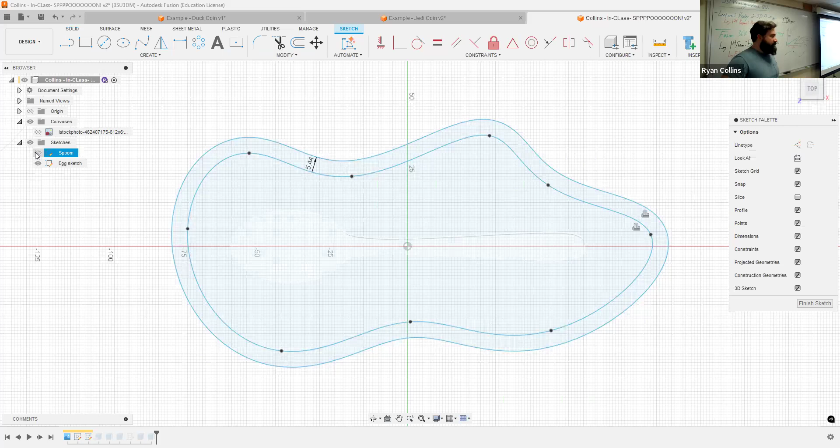Double click there, brings it back up. The only problem with going back on the time slider is if it's something that predates another thing you're trying to build around. In this case, the spoon was already there, but say you made the spoon after you made the outline, it won't show up.

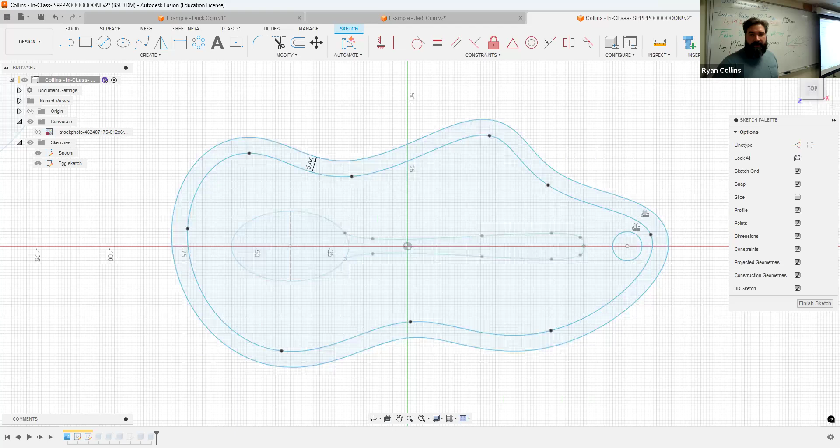That's the only problem, then you might have to make a sketch after the fact. But in here, I can just say, I'm going to add a little circle, sure, 10 millimeters right there, hit OK. Now that's not going to alter anything yet, but as I mouse over which extrude tool, it'll highlight what that is affecting. If I right click on that one, go edit feature, and now I can just...

If I can actually grab it, uncheck that circle. Come on, don't make me look like a schmuck. It's not letting me select it. So fine. Oh, there we go. So now if I deselected that, hit OK, it recalculates everything.

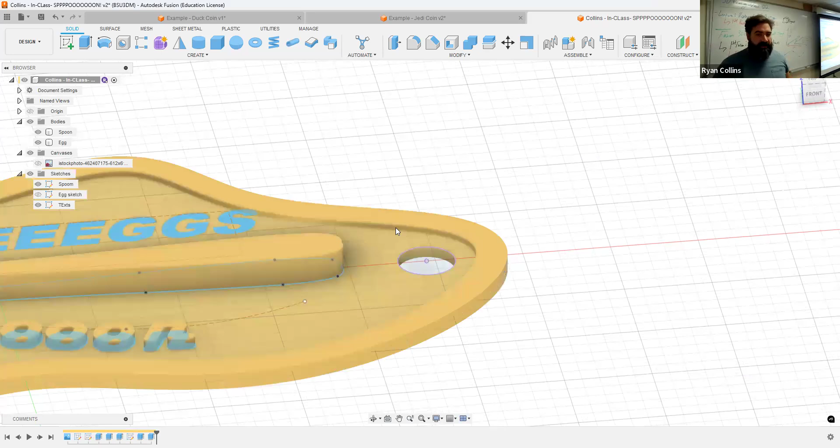Now the hole's there. The last thing I definitely recommend doing is stuff like adding fillets. These are simply just ways to round over sharp curves. In this case it's not really going to matter much, but a fillet can also add strength to your print. You can select by faces or by edges.

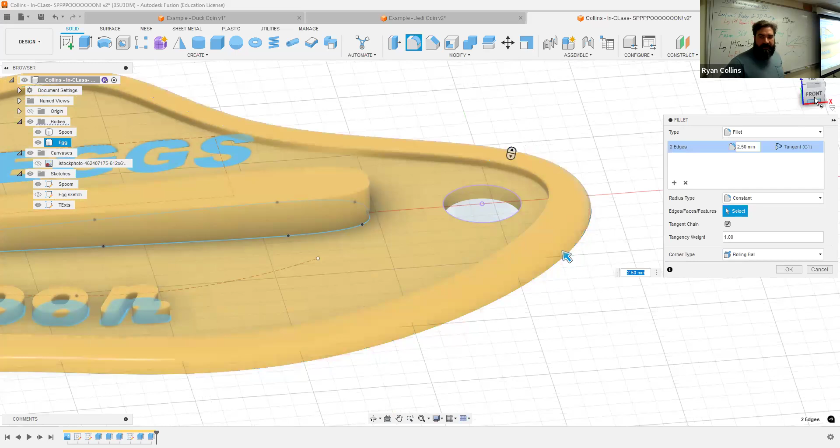In this case, I'm going to select those two edges, and I can draw it in, drag it in by hand until it gets curvy. I don't know why those are two, it's making those two very different ones. There we go. Yes, there's a full round fillet, but we'll talk about that stuff later.

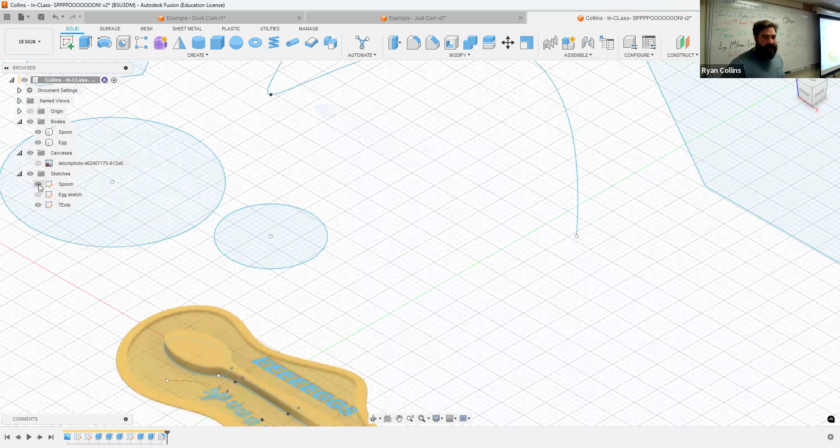You can also add to them, say like, oh, actually I wanted to, oh God, I keep forgetting there's all that stuff out there. Say I want to add curvature to the key ring. I would definitely recommend that if you're planning on putting a circle, like one of those keychain key rings, through here, especially if it's a smaller circle, it needs to be curved. Otherwise the curved chain won't go through that.

So go to fillet, and let's try the other option, full round fillet. All that means is if I select the inside face here, that's selecting everything. Let's try it. It's going to automatically make it the right fillet diameter, so it makes it a perfectly curved inlet. That's all. So play around with that stuff.

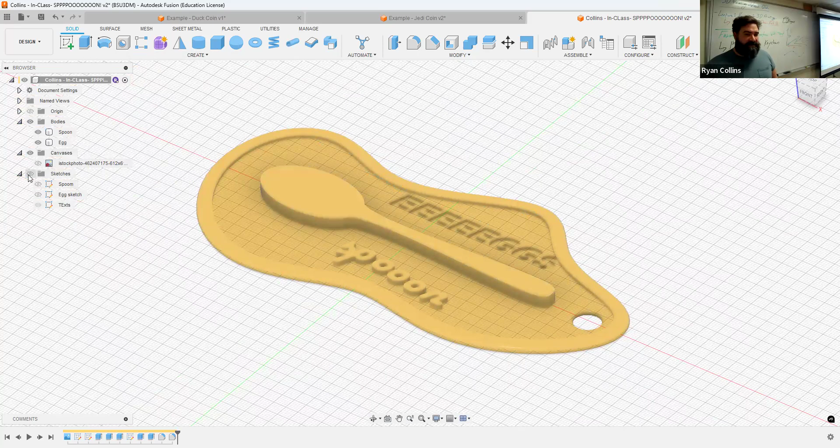Hide all the sketches. We can certainly add other details to stuff, like the spoon shape. I could always go in and say, let's unhide that, unhide the spoon shape, make an extrusion on there. Now it's going to do the whole thing.

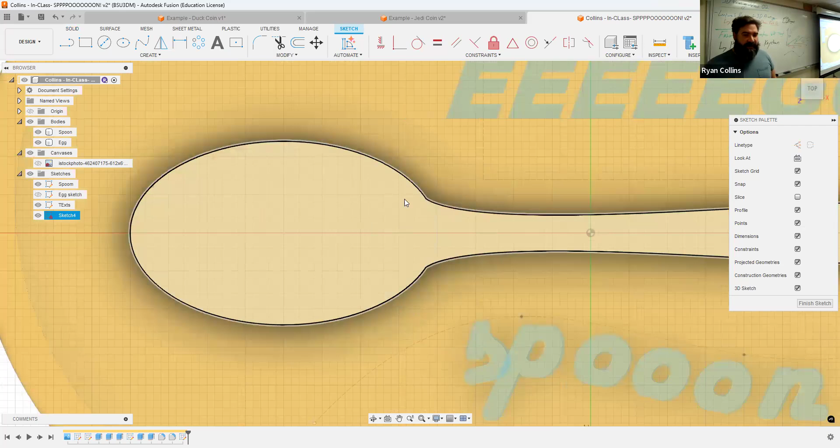I can make a smaller circle on here and just make a reduction, meaning I want to draw a sketch on the face up top, and just shrink that line down a little bit or something. I can say, instead of trying to trace that circle or that ellipse, let's use the offset tool, and let's just shrink a small hole there or something like that.

Okay, hit finish, I keep forgetting about that. Let's extrude just that little section now, drag it downward a little bit, hit OK. It just makes a little cut. So that's all, that's the kind of stuff we're playing with.

You can add curves, fillets, stuff like that. But the main thing is we are trying to make a multi-tiered general shape, depending on how many details and all that kind of stuff, how much you want to add. You want to add text, more power to you, but it needs to be basically image-based. The color is irrelevant right now, we're going to add color through the filaments themselves.

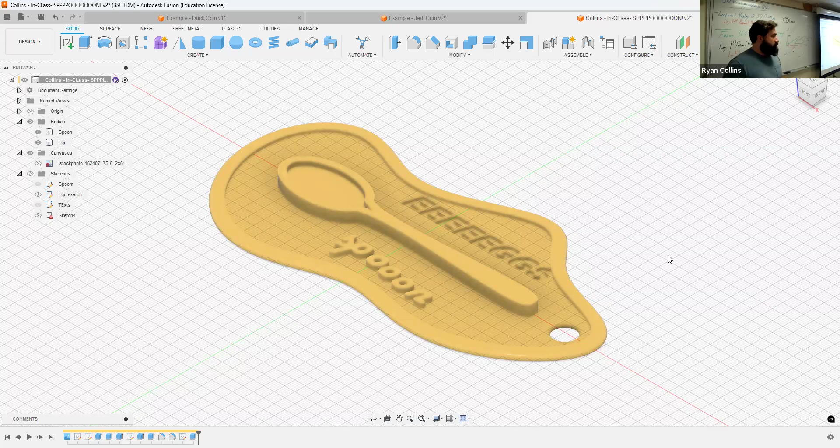But that's pretty much it, play around with it, make something weird, why not. Last thing, make sure to save it. You can add features, you can add suggestions, or you can add notes to that. But the main thing is, as you save these, remember it's going to add different versions.

You don't have to make separate files, it will stack and make multiple versions. That's it, so play around, have fun. Try not to freeze up your computer. And on that, make sure to manually save often in case you freeze up your computer. All right, enjoy.